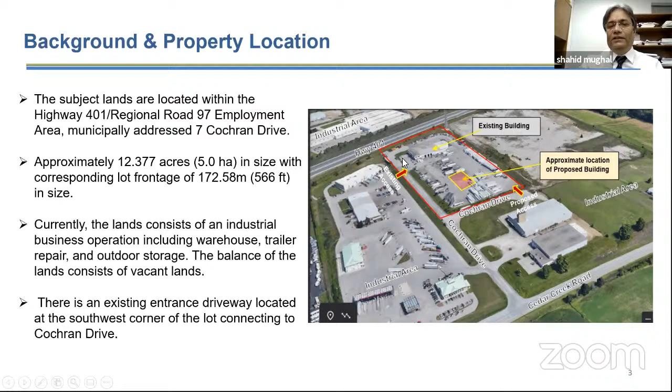Staff reviewed the provincial, regional, and township statutory documents. The provincial documents support industrial development within the Highway 401/97 employment area, with key policies stating that we should make more efficient use of existing employment areas and vacant or underutilized employment land, increasing employment densities, and ensuring the availability of sufficient land in appropriate locations for a variety of employment to accommodate forecasted employment growth to the horizon of the plan, which is 2031 for the township official plan as well.

As I mentioned, the provincial policy dictates to the regional official plan and township official plan. The land is located within the Highway 401/97 employment area, where a diversified economy is promoted and encouraged for industrial development. The region's policy says the land within this designation is intended to provide additional opportunity for employment growth and business development within the Township of North Dumfries. So this means the proposed consent, which was approved on August 9th, aligns with the provincial policies as well.

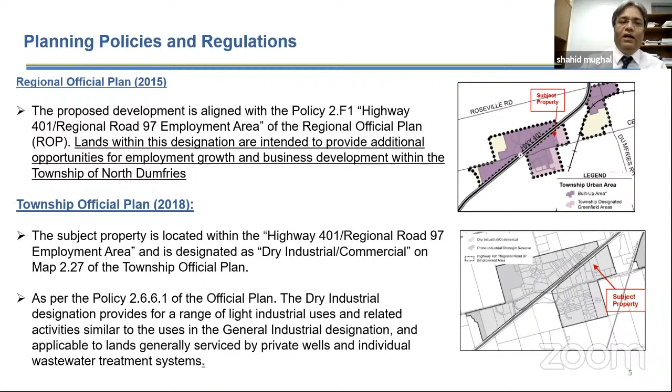The property is currently zoned as Zone 11, and Zone 11 permits specific uses and regulations outlined in Zone 9, which permits large-scale processing, manufacturing, packaging, and storage of goods and products. As mentioned, since this is located within Zone 11, the proposed severance aligns with the general zoning bylaw.

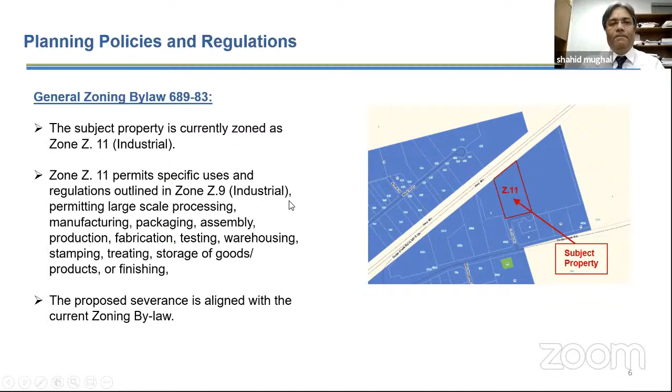As I briefly mentioned, on August 9th the Committee of Adjustment granted consent approval to create one new industrial lot and one retained lot. The proposed severed lot, as you can see on the map, is to create one new industrial lot of 5.45 acres in size, with a corresponding lot frontage of 480 feet on Cochran Drive. The retained lot is approximately 6.9 acres in size with a corresponding lot frontage of 86 feet, which is 26 meters, on Cochran Drive. When the committee approved this, there was a key condition that the consent application for mutual easement for the proposed retained and severed lots be approved to recognize the overland flow of surface water, as you can see on the map, the blue and yellow strips, showing the surface water flow through the respective lots to Cochran Drive.

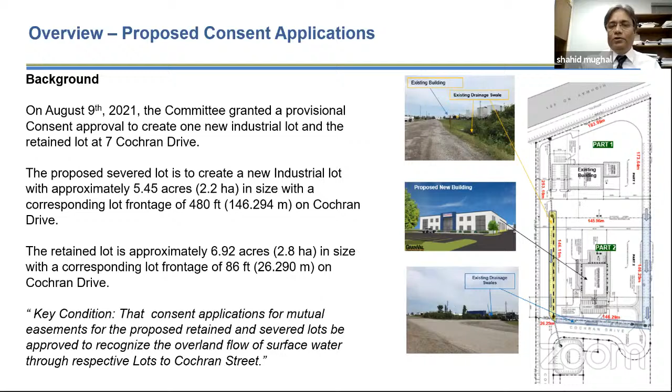So just to satisfy the provisional consent approval, the applicant submitted these two consent applications for mutual easement. For application B04/21, the mutual easement is proposed for the retained lot, Part 1, in favor of the severed lot, Part 2, to recognize the existing drainage so as to establish a legal outlet to Cochran Drive. The mutual easement is proposed along the eastern and southern property line, as you can see on the map in blue. The second application, B05/21, proposes a mutual easement to recognize existing drainage swales that straddle the property line.

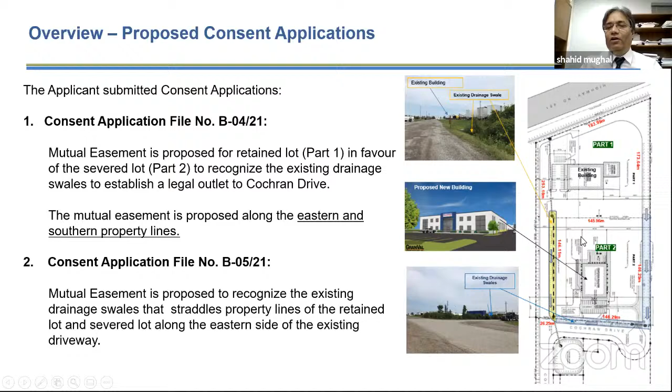The drainage swale straddles the property line of the retained lot and the severed lot along the eastern side of the existing driveway. If you see on the map, this is the existing driveway, and this driveway access is part of the retained lot, and the drainage swale straddles the property line of the retained lot, Part 1, and the severed lot, Part 2.

So following the process, the staff also circulated the submission package to agencies. No correspondence or comments were received from any member of the public. We also mailed out the public meeting notice and installed the property notice sign at the property, and again received no comments or concerns from the public.

We also circulated the application to external agencies and internal departments. The regional staff expressed no objection. Grand River Conservation Authority expressed no concern. The Public Works Department also expressed no objection to the proposed consent application.

So staff recommend to the Committee of Adjustment that the consent application be approved, based on the recommendation that no major comments or concerns were received from the public or any agencies. The proposed consent application for easement satisfies the condition of the provisional consent approval granted by the Committee of Adjustment at the August 9th meeting. The proposed consent for easement will not create any negative impact to the adjacent property. The subject property is located within the Highway 401/97 employment area, and the general intent of the official plan, zoning bylaw, and provincial policy documents are maintained.

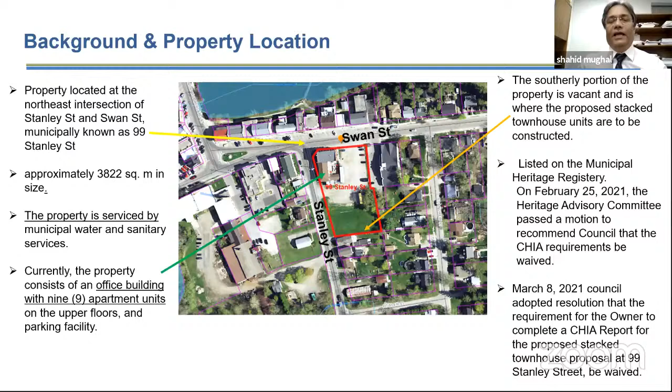So basically, the design of the building was quite compatible with the existing building, which is listed as a heritage property.

Staff reviewed the provincial policy documents, regional and township policy documents as well. Section 45 of the Planning Act sets out the criteria to be considered when reviewing the minor variance application.

Basically there are 4 tests the committee considers when making the decision: Is the proposed minor variance minor in nature? Is the proposed variance desirable for the appropriate development of the land, building, or structure? Is the proposed variance keeping with the general intent of the zoning bylaw? And is the proposed variance keeping with the general intent of the official plan?

Staff also reviewed the regional official plan and the township official plan. Both policies basically support the proposed development. The property is located within a built-up area in the community of Ayr.

Policy 2.D.3 (a) of the regional official plan states the urban growth center designation identifies the region's primary business, civic, commercial, and cultural center that will be planned and developed to accommodate a significant share of the region's future population and employment. And the key policy of the township official plan...

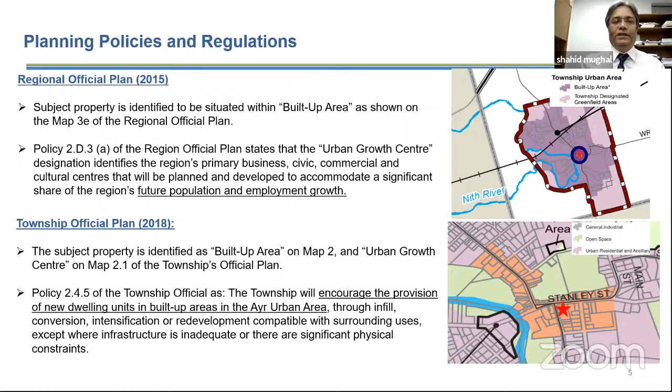The infrastructure is already available there. As I mentioned, the property is serviced by municipal water and sewer. Currently the property is zoned as Zone 6, urban commercial. The general intent of Zone 6 allows mixed commercial and residential land use activities. As you can see on the map, it's zoned as Zone 6.

When we look at the key applicable policy, section 12.2.8 of the zoning bylaw permits dwelling units to the rear portion of the property, to the rear of the permitted commercial uses. And section 6.10.3 states that in Zone 6, the building line shall be the front line. I will explain this in the next slide.

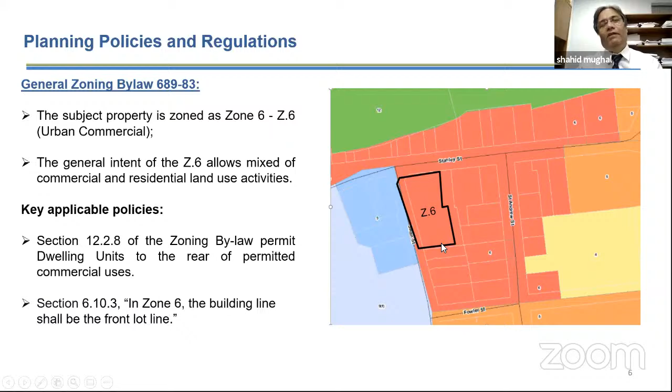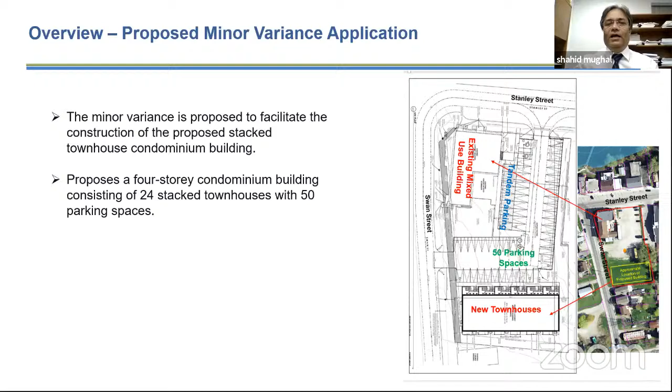As I mentioned, the minor variance is proposed for the construction of the proposed stacked townhouse condominium. As you can see in the map, there's an existing mixed land use building at the northeast corner of the property. The applicant is also proposing 50 parking spaces with 9 tandem parking spaces. The applicant is proposing the new townhouse building on the southern portion of the property, consisting of 24 units.

The applicant submitted the minor variance application with multiple minor variances. For example, definition 2.160 of the zoning bylaw, regarding off-street parking spaces, states that the minimum parking dimension required is 3 meters by 6 meters. However, the applicant proposes a parking space dimension of 2.75 meters by 5.5 meters.

The second minor variance is according to section 6.13.3 of the zoning bylaw, which requires off-street parking spaces to be located a minimum of 1.5 meters from a lot line. However, the applicant proposes off-street parking spaces to be located 0.0 meters from the lot line along Swan Street.

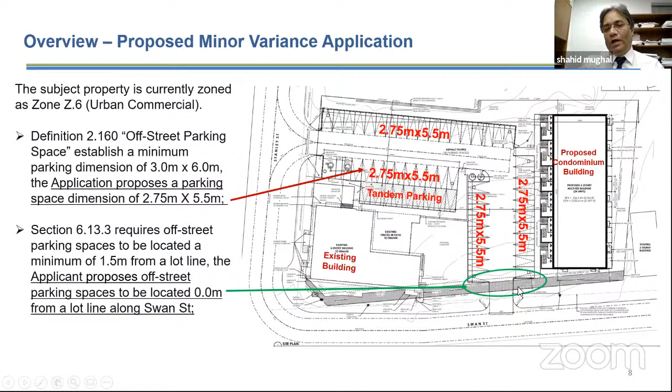As I mentioned, the subject property is currently zoned as Zone 6. Looking at the existing development, there are 9 existing small studio and 1-bedroom apartments, and the zoning bylaw requires 1.5 parking spaces per unit. Based on this number, 14 parking spaces will be required. However, the applicant is proposing 9 parking spaces for the

existing apartment building. For the existing offices, according to the zoning bylaw, 1 space is required for each 30 square meters of floor area. Based on this, 10 spaces are required. However, the applicant is proposing 9 standard parking spaces with 9 tandem parking spaces, including 2 barrier-free parking spaces, so altogether that'll be 18. So technically it's more than what the zoning bylaw requires.

And I will explain in the next slide how this is supported by the parking study conducted by the applicant.

As I mentioned, the applicant is proposing 24 stacked townhouses, which will be rental condominiums. According to the zoning bylaw, section 6.13.5, townhouses or stacked townhouses require 2 spaces per dwelling unit. The applicant is proposing 24 stacked townhouses, so based on that number, 48 spaces would be required. The applicant is proposing 30 parking spaces, a rate of 1.25 per unit, and additionally proposing 18 spaces dedicated outside of business hours.

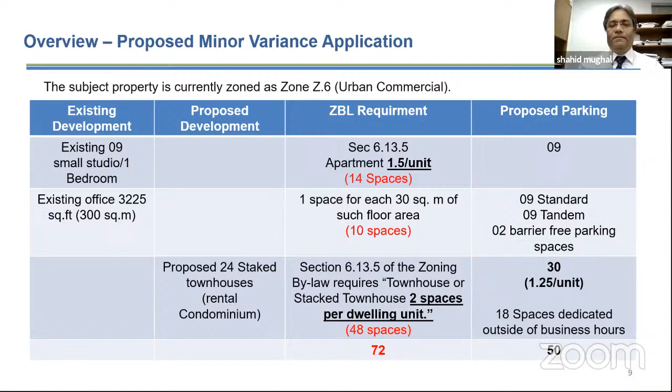Regarding height, section 6.3a of the zoning bylaw establishes a maximum building height of 3 stories, but the applicant proposes 4 stories. It is proposed that the maximum height threshold of the structure will be approximately 11.80 meters.

As you can see on the sketch, definition 2.211 defines the first story as the story with its floor closest to grade and having its ceiling more than 1.8 meters, which is 6 feet, above average grade. The first story of the proposed development exceeds 1.8 meters above average grade. So when you see this elevation, it seems like there's a 3.5 story. The zoning bylaw requires that if it's more than 1.8 meters above grade level, it will be considered a first floor or story.

That's why the applicant is requesting the minor variance for the fourth floor. Otherwise, it will look like a 3.5 story.

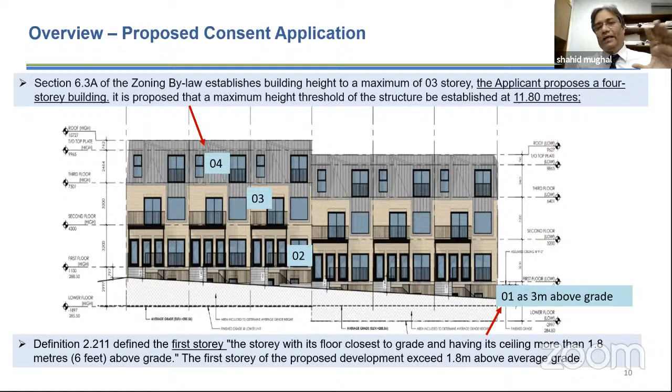The other minor variance requested by the applicant, as you can see on the sketch, is that section 12.3.2(d) of the zoning bylaw establishes no exterior stairways, whereas the applicant is proposing dwelling units with exterior stairways, which will be accessed from the parking.

Section 12.3.2C of the zoning bylaw requires that each dwelling unit shall have direct access to a public street by means of a hall or stairs. However, the proposed dwelling units have no direct access to the public street by means of hall or stairs. So access to the proposed dwelling units will be from the parking, which will be quite accessible and functionally, I think, better.

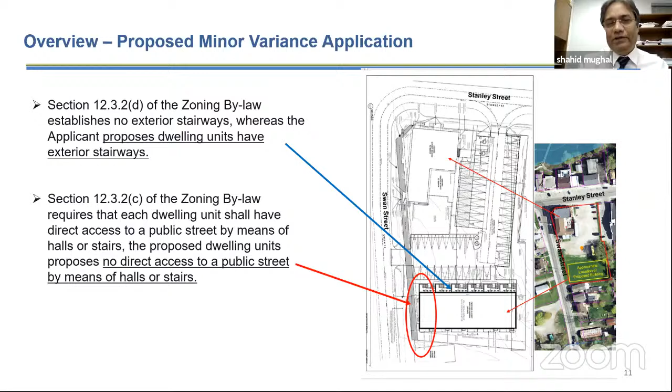So staff also received two pieces of correspondence from members of the public. Mainly they're concerned about the height and the reduced number of parking. They mentioned that 28 or 30 parking spaces is not adequate for the proposed 24 dwelling units, that it will create traffic congestion, and it will be out of character with the existing downtown area, because the applicant is proposing 4 stories. They also mentioned that the number of stacked units should be reduced to allow for more parking, as leasing or selling units with one assigned spot could pose a challenge.

So basically they're concerned about the height, the number of parking spaces, and the character of the proposed development.

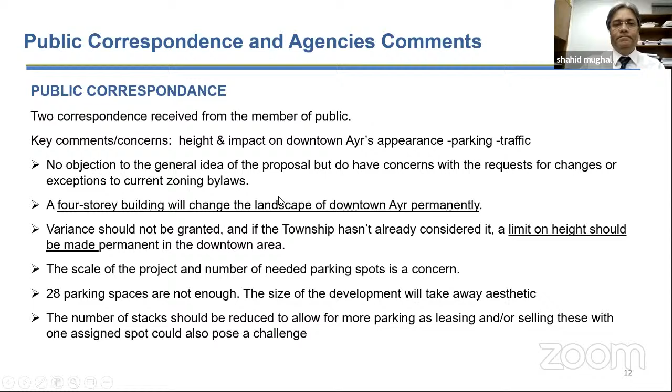Staff also circulated the submission package to agencies. We didn't receive any concerns from the agencies. The regional municipality expressed no concern but mentioned that regional development charges would be required prior to issuance of a building permit. Grand River Conservation Authority expressed no concern. Enbridge and CAS expressed no concern, and Energy Plus provided standard comments that the owner will be responsible for all costs associated with relocation or upgrade of existing electrical plants if required as a result of this proposal, and that the owner or applicant will be required to grant easement to the satisfaction of Energy Plus if required.

The Public Works Department expressed some comments and concerns, mentioning that there's no public transit service available in the area, and that the development references used as justification are not equivalent given the size of the unit, and that the stalls will have painted assigned numbering. The Public Works Department does not have any objection, but will require the parking study to be updated to include the information provided by the applicant's agent.

And the 1.5 meter parking setback is acceptable at Stanley Street. As I mentioned before, the property is located at the intersection of Stanley and Swan Street, so on the Stanley Street side, the applicant is proposing a 0.7 meter setback for the parking.

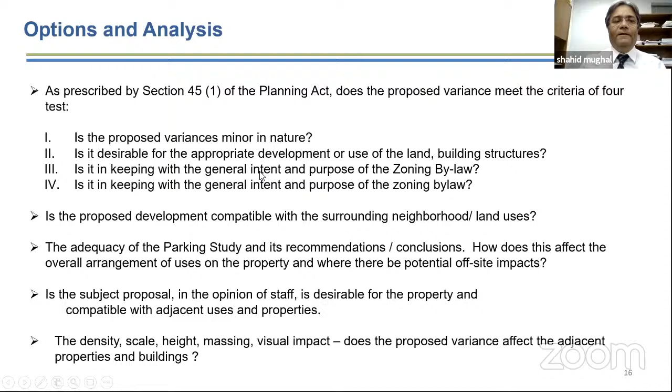As mentioned, the applicant also submitted a site plan application concurrently with this minor variance application. Matters regarding setbacks, stormwater management, and parking will be considered through the site plan application. Staff will also consider density, scale, height, and massing visual impact as well.

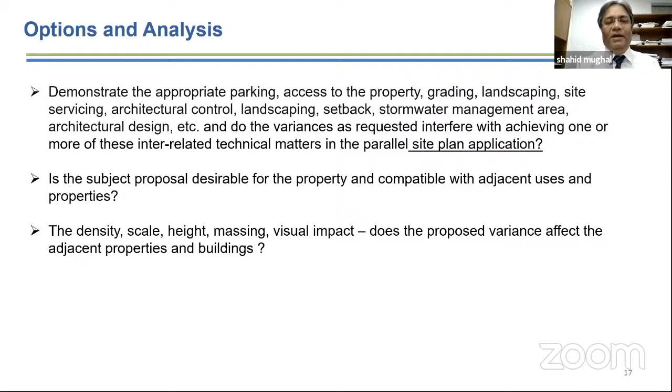So staff recommending that all comments and correspondence received from members of the public and government agencies through the consultation process be returned to staff for a future report to council on the disposition of this matter. Thanks, Madam Mayor. Thank you, Shahid.

I see that there are no members of the public with any questions. We have Matthew Robson, Craig Robson, and William Thompson registered here to answer any questions if council has any. Councilors, any questions or comments?

Seeing none, since it is a bit of a lengthy motion, Ms. Sage, you do not have to read it in its entirety. Well, actually, it's not that bad. Wait a minute, got this right one? Yes, so you can read the motion, Ms. Sage, please. Oh, I'm sorry, Councilor McCreary.

I have a question about the parking issue. Right now, I guess the number of parking spots required by the zoning bylaw is 80, but you're actually only going to be able to offer 54. I'm wondering if there would be a way to alleviate some of this parking pressure if we were to take some of the spaces allocated to the office building and have the employees park off-site, maybe at the Gibson Street parking lot or the ACC arena parking lot. So maybe the office spaces could be on a first come, first served basis, and when they're full, the employees could park off-site. I'm wondering if you considered that.

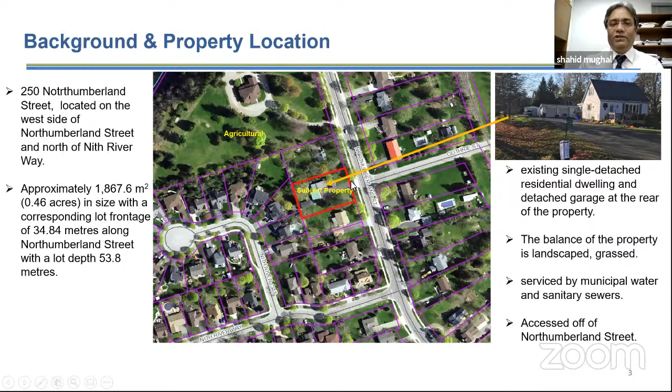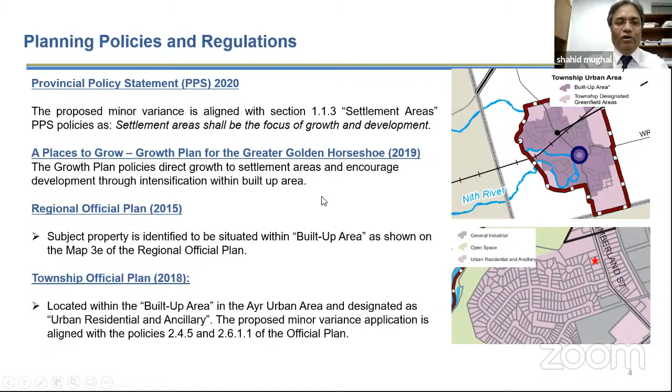Staff also reviewed the provincial policy document and regional and township official plan documents as well. The proposed minor variance and the consent application approved by committee in the past align with these documents: the provincial policy document, regional official plan document, and township official plan as well.

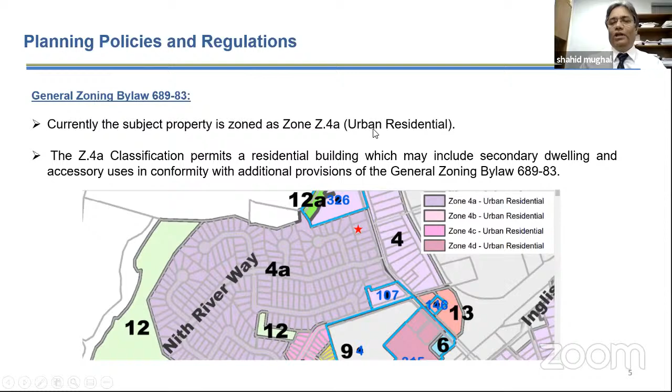The property is currently zoned as Zone 4A, and the Zone 4A classification permits a residential building, which may include secondary dwelling and accessory uses in conformity with the additional provisions of the zoning bylaw. So to satisfy the provisional consent approval, the applicant submitted this minor variance application.

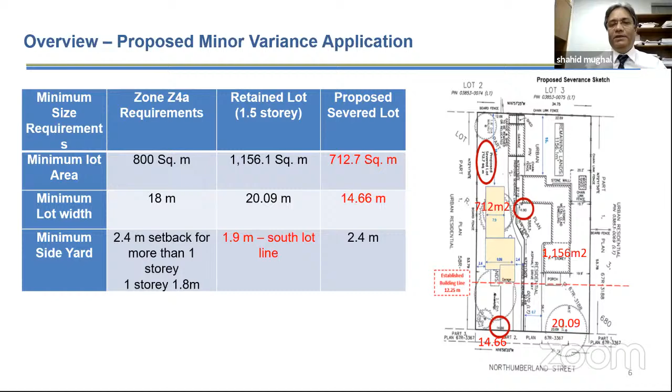As you can see, the current zoning bylaw Zone 4A requires an 800 square meter total minimum lot area; however, the applicant proposes 712 square meters for the proposed severed lot. The minimum lot frontage required is 18 meters; the proposed severed lot is proposing 14.66 meters. And the minimum side yard requirement is 2.4 meters for more than 1 story, so the proposed existing dwelling unit is 1.5 storey. The retained lot requires a minor variance as well: where 2.4 meters is required, the applicant is proposing 1.9 meters for the south lot line.

The notice of public meeting has been mailed out to the adjacent property owners, and the property notice sign board has been installed on the property. We received one correspondence, and also one call from an interested member of the public.

The key concern was that the proposed consent does not conform to the minimum lot area size, and this undersized lot conforms to the nature of the streetscape and community. The severed lot configuration is contrary to any other along Northumberland Street.

Basically, in the past, the committee also approved one property for severance, adjacent to this 250 street. At that time, there was a condition that the existing structure, which straddled the property line, needed to be removed.

The member of the public also mentioned that this will set a precedent, continuing to increase the density and traffic access directly onto Northumberland Street. Staff is of the opinion the provisional consent approval was granted on May 26th, and there was a timeline to appeal the consent application, which was June 21st.

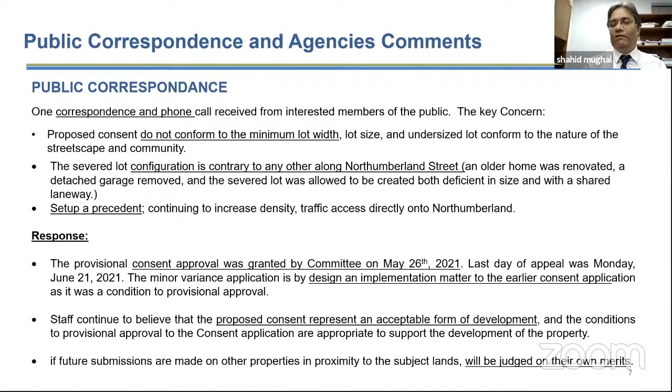Staff also circulated the submission package to agencies. We didn't receive any comments or concerns from any agency or department. For example, Public Works expressed no objection, the GRCA expressed no concern, and Energy Plus provided standard comments with no objection. The region mentioned it will require development charges prior to issuance of the building permit.

To evaluate the application, staff reviewed the four tests of the minor variance as required by the Planning Act. Regarding whether the proposed minor variance is minor in nature, staff understands the requested variance recognizes the reduced lot size from 800 to 712 square meters and lot width from 18 meters to 14.66 meters for the severed lot, and the side yard from 2.4 meters to 1.9 meters for the southerly property line, which is minor in nature.

As the current zoning bylaw allows single-detached dwellings, the proposed development is also desirable for the property and won't create any negative impact in the area. The property is currently zoned as Zone 4A, so it also maintains the intent and purpose of the zoning bylaw.

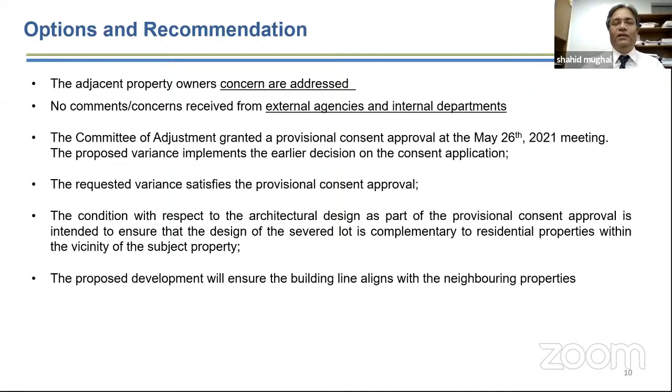The last point is that the proposed development will ensure the building line aligns with the neighboring property, which I think is 12 meters, so that will align with the neighboring property as well. Based on these recommendations, staff is recommending to the Committee of Adjustment that the decision on the minor variance application be approved.

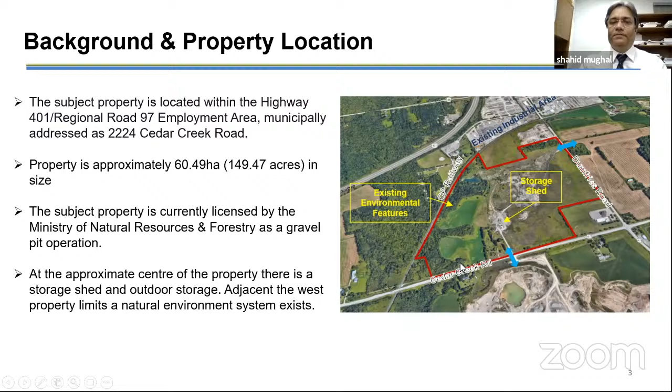The proposed development aligns with the Provincial Policy Statement and the Growth Plan for the Greater Golden Horseshoe. Section 1.3 of the Provincial Policy Statement supports economic development within employment areas, planning for industrial or manufacturing uses, providing opportunities for a diversified economic base, and maintaining a range and choice of suitable sites for employment uses. The Growth Plan follows the same policy, supporting economic development by making more efficient use of existing employment areas and vacant or underutilized employment land, increasing employment densities, and accommodating forecasted employment growth to the horizon of the Growth Plan, aligning with economic development goals and strategies to retain and attract investment and employment.

The proposed development also aligns with the Regional Official Plan and Township Official Plan, as it is located within the Highway 401/Regional Road 97 employment area. Policy 2.f states that land within this designation is intended to provide additional opportunities for employment growth and business development within the Township of North Dumfries.

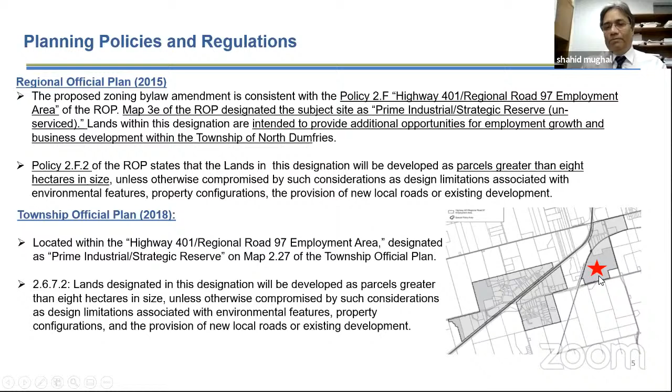Policy 2.6.7.2 of the Township Official Plan states that land in this designation will be developed as parcels greater than 8 hectares in size. The applicant is proposing parcel sizes of approximately 8 hectares to align with the Official Plan policies. As you can see in the map, this property is located within the Highway 401/Regional Road 97 employment area.

Currently, the property is zoned as Zone 14, Mineral Aggregate, and the western portion is zoned Zone 1, Agriculture. The applicant is proposing to rezone from Zone 14 to Zone 11 for industrial development, and the portion zoned Zone 1 Agriculture will be proposed as Zone 12A to protect and preserve the natural environment. As I mentioned previously, there's an environmental feature located along the western property line.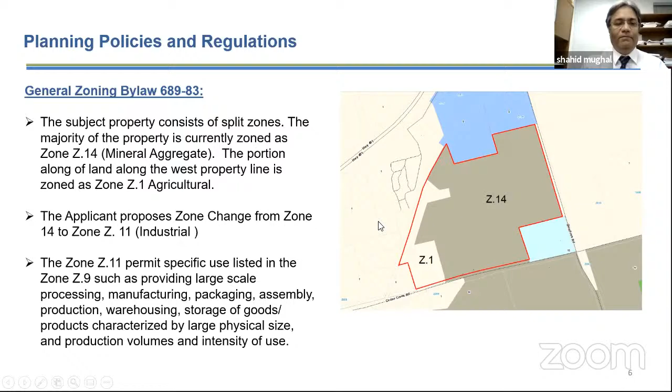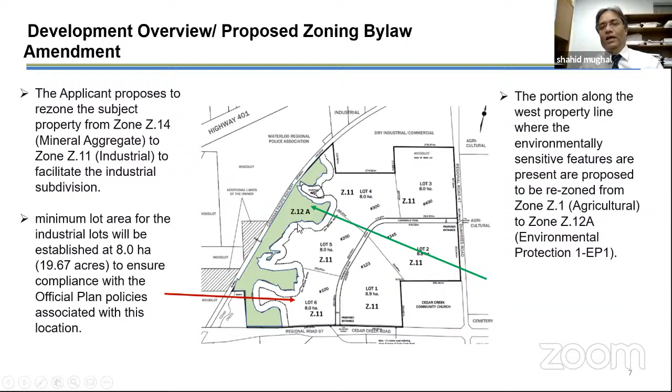Let me share the proposed application for zoning. When you see the draft plan of subdivision map, the applicant proposes to rezone the property from Zone 14 to Zone 11, with a minimum lot area of 8 hectares for the industrial lots. As you can see in the map, there will be 6 lots. The portion along the property line where environmentally sensitive features are present is proposed to be rezoned from Zone 1 Agriculture to Zone 12A, Environmental Protection EP1.

In the proposed draft plan of subdivision, the applicant is proposing 6 lots, each approximately 8 hectares in size. The proposed industrial lots will be accessed through an access road connecting Dumfries Road to Cedar Creek Road. As mentioned, there are two lot frontages, so there will be a curve-shaped road connecting Cedar Creek Road to Dumfries Road.

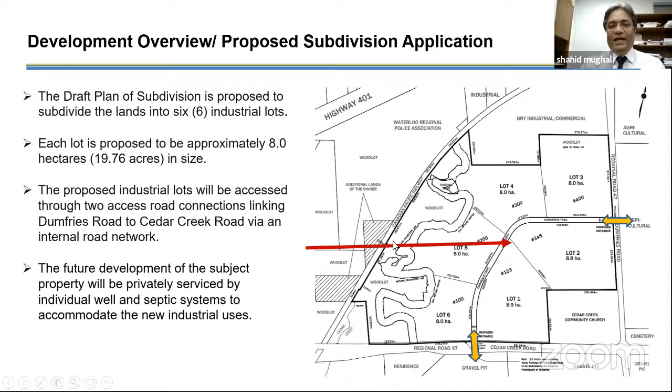The future development of the subject property will be privately serviced by individual well and septic systems to accommodate the new industrial uses.

Staff submitted the submission package to agencies and departments, and also circulated the notice of public meeting to adjacent property owners. We received one correspondence from a member of the public with a key concern regarding rehabilitation requirements. They also received another email concerned about industrial development on the subject property, suggesting this shouldn't be approved because it's a Zone 14 property and should be rehabilitated back to agriculture. However, the property is located within the Highway 401/97 employment area.

Staff also circulated the submission package to agencies. The Region's staff expressed no concern with the zoning bylaw amendment application, but expressed a condition for the inclusion of a holding provision in the site-specific zoning bylaw, requiring the removal of the aggregate license for the subject land. The holding provision shall not be released until the Region of Waterloo is in receipt of documentation that the license has been removed, as acknowledged by the Ministry of Natural Resources and Forestry.